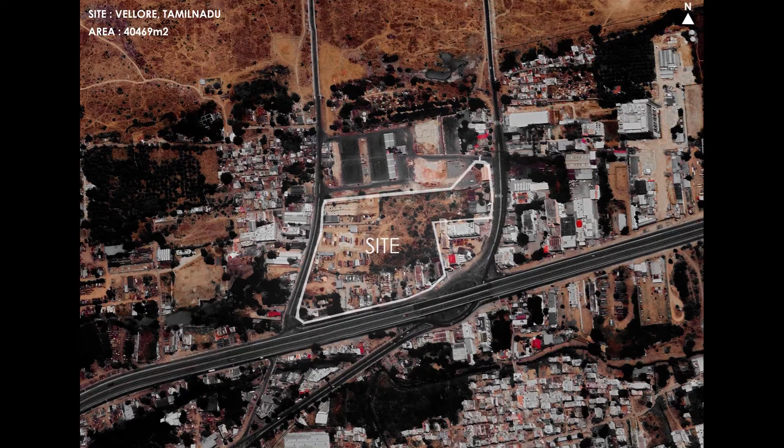The idea of the Museum of Vellore evolved with a vision to create a space expressing the history and culture of the city. The site is located parallel to the elevated highway that connects two major cities, Bangalore and Chennai, at one of the important junctions of the city.

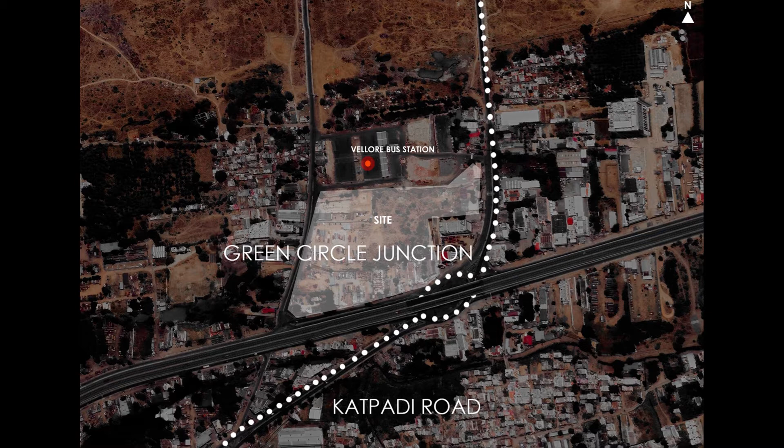People of various communities and parts pass through this junction. Behind the site is located the Vellore bus station, where several number of people transport every day. The site is currently used as a parking space.

With the detailed site study, a SWOC analysis is generated. Strengths include easier transportation access; the location is an important and very busy junction of the city, and the site is 1.5 kilometers from the Vellore Fort and Temple, which gains lots of tourism.

Weaknesses include the junction facing high traffic resulting in constant noise pollution, and no predominant landscape or vegetation present. Opportunities: the site location means the museum would become an important cultural landmark of the city. Challenges: the entrance of the site needs to be located strategically to avoid traffic congestion.

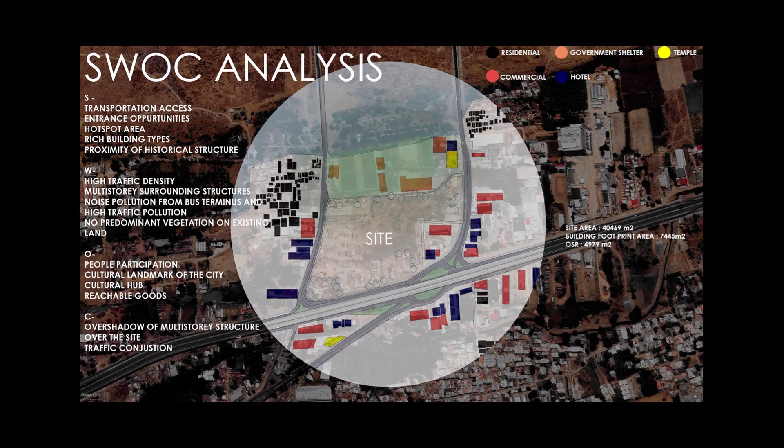I have studied 3 case studies, 2 from India and 1 from abroad. Dakshina Chitra, Chennai, is a very famous heritage center located in the Muttukadu area of Tamil Nadu state. It is an exciting cross-cultural living museum of art, architecture, lifestyle, crafts and performing arts of South India.

The program of this was more than a museum. The design of the common areas for events, cultural activities, and the crafts bazaar was very much inspiring and effective in the museum. My next case study is the National Museum of Prehistory from Taiwan.

The museum site is adjacent to the Taiwan high-speed rail route, where a train passes by about once every few minutes. Taking advantage of this unique relationship with the high-speed rail, visitors are first taken through a square glass accessway ascending to the same level as the passing trains, where they can view this ultra-fast high-tech mode of transportation as well as the futuristic facilities, showing them the modern and the future.

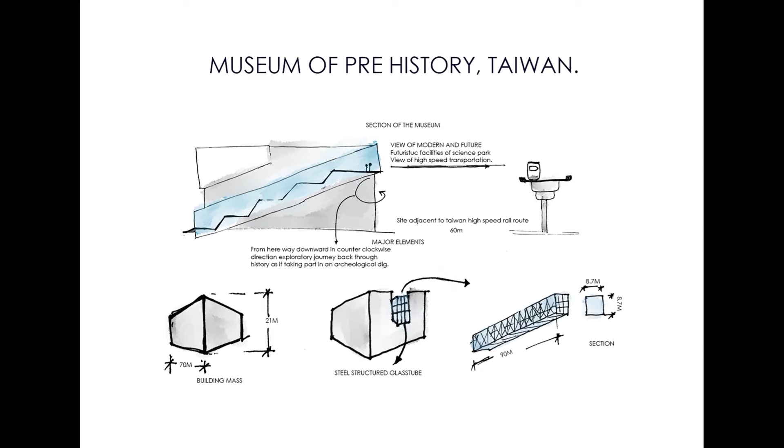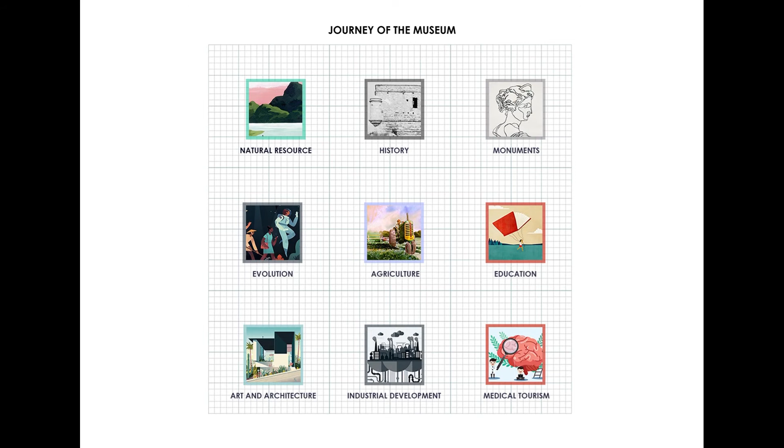Creating a museum with a base of culture, biodiversity, and economy of the city, the journey of the museum is drawn such that the viewer could radically connect with nature, history, and art and architecture. Program requirements follow.

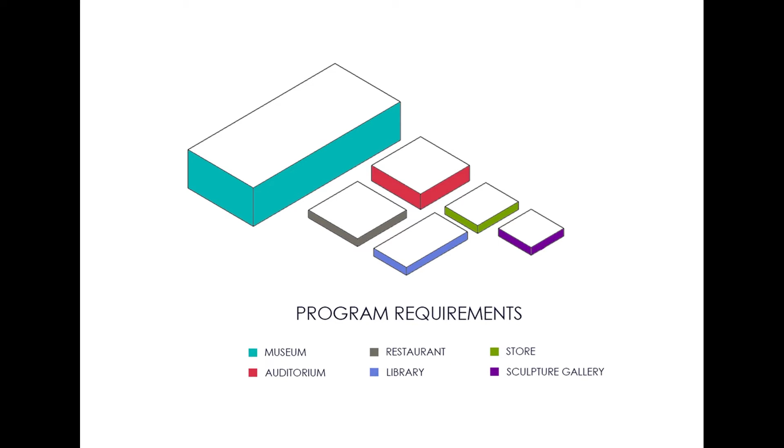Museum as a major program is designed along with restaurant, library, and auditorium. From observations made from the site study, the whole building mass is offset from the busy traffic road, creating a large arena which could also be used as an area for cultural programs during festive seasons.

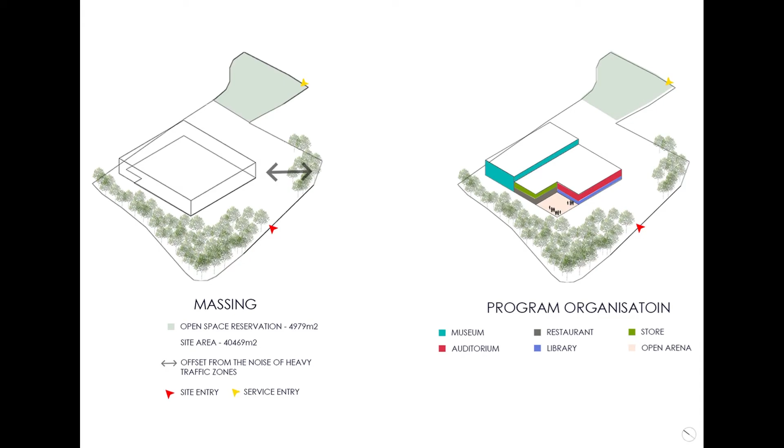This vision of an open space for events and activities which enables fusion and interaction of different cultures and connects in an optimistic manner is inspired from the case study Dakshina Chitra. A transit is created, connecting the open arena to the museum.

The library and restaurant are designed in the foreground of the large museum to create an educational and recreational destination. The entire museum is designed introverted to focus on the journey of the city, while taking advantage of the parallel elevated highway, an extroverted communal space in the form of large staircases which reaches out for the external view of the city is designed.

The journey for the city view is designed with a museum store and art gallery as levels of transition before one reaches the city view. This is made with the idea to create more communicative spaces.

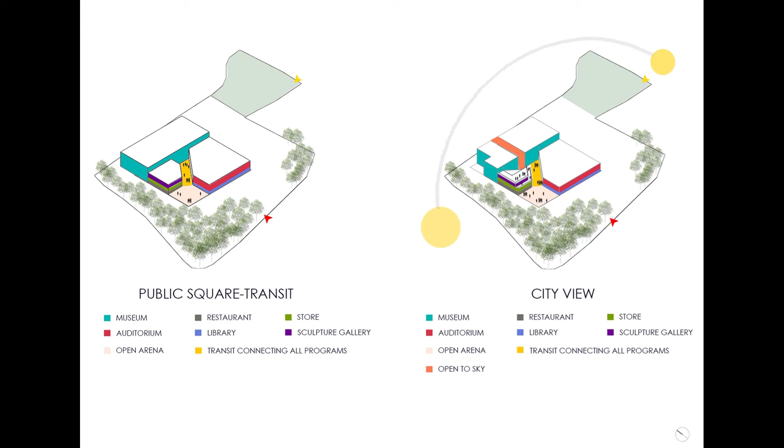The exploded view shows how the museum, library, auditorium and restaurant are designed in a connective manner, also optimizing and utilizing the potential of the surrounding views.

As said earlier, the site is approached responding to its surroundings. As one enters the site as a pedestrian, the walk from the entrance to the building, surrounded by trees, creates relaxation and serenity as a transition from the busy roads.

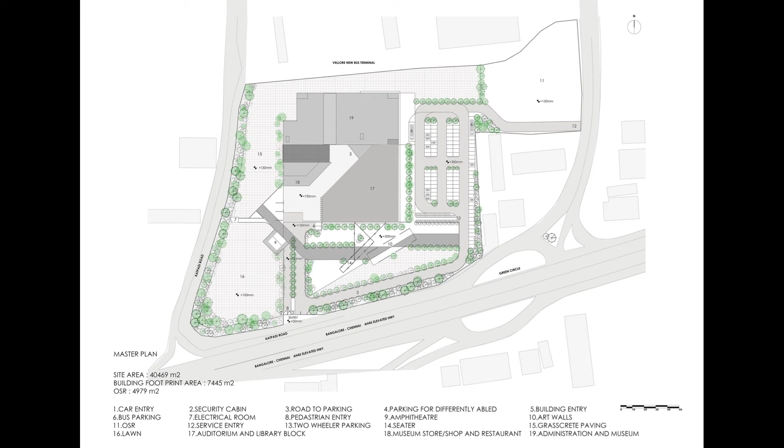The walk from the parking is through art walls and floating seaters. The landscape allows a complete space for nature with floating seaters, inspired from swings but designed as rigid seaters suspended from steel pipes. Parking near the building is allotted for differently abled visitors.

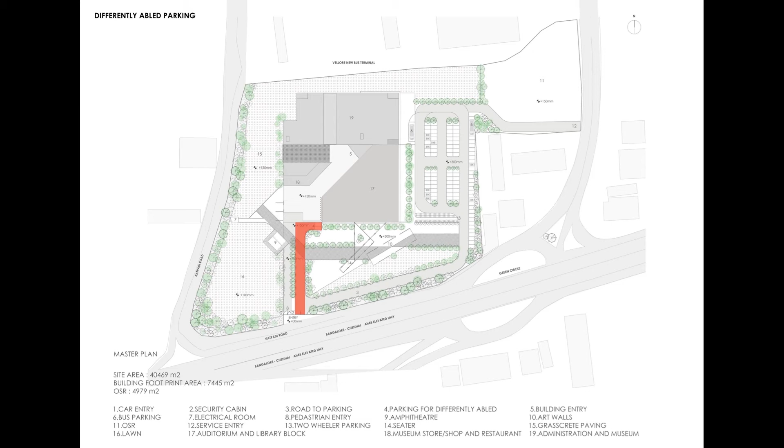I have color coded and denoted the spaces as blocks for ease of explaining in detail. Designed as functional spaces, the galleries appear in harmony on each floor. The Museum of Vellore is designed as a journey, making a radical connection with nature.

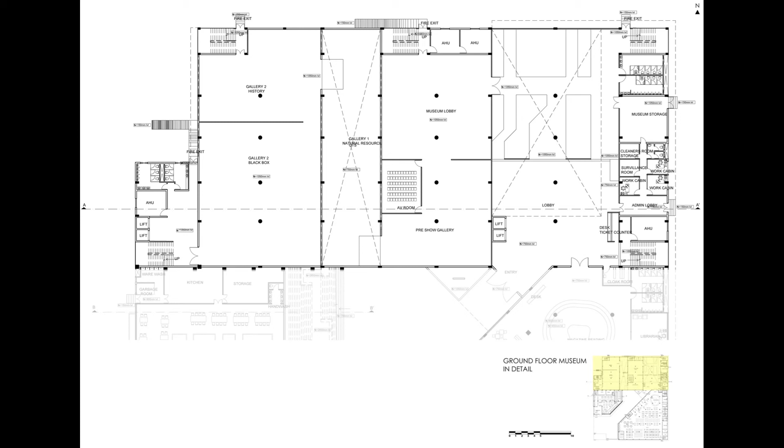Gallery 1 covers natural resources, then education and development of the city, and art and architecture. Administration space is on the ground floor, along with the lobby, the audio-visual rooms, and the pre-show gallery.

The journey starts with representing the natural resources of the city: the river Palar and the mountains around the city, which act as a natural barrier. The gallery for this is designed with riverbed flooring, a walk through river sand, and open to sky, to create a refined meaning to the space and the gallery.

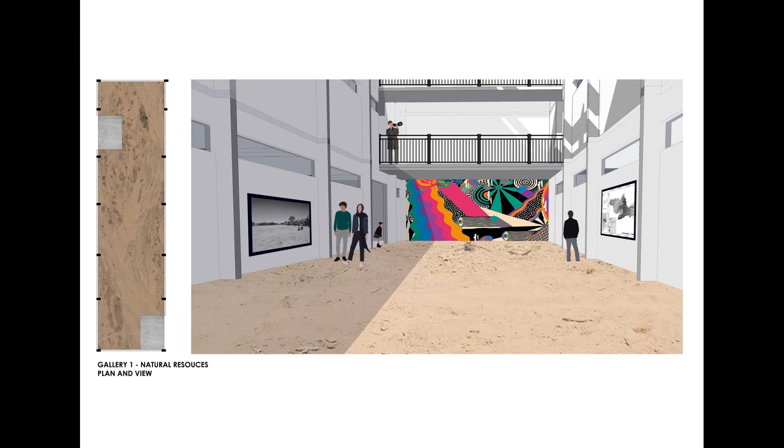Gallery 2 shows the history, the rulers of the past, and the Great Vellore Fort. The second part of gallery 2, named the Black Box, represents an important historical event, the Sepoy Mutiny, which was the first fight against the British, held in the Vellore Fort complex.

This is a 3D gallery where people are made to walk around 3D models of the sepoys fighting. The vision of the 3D gallery is to let people know the struggle, patriotism, and identity of the Vellore people.

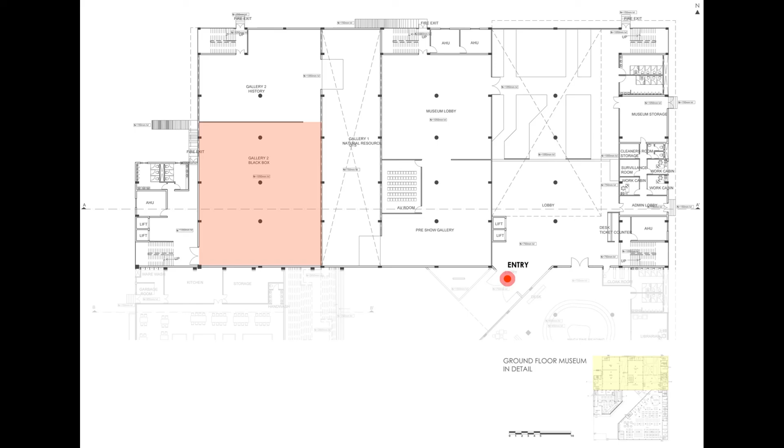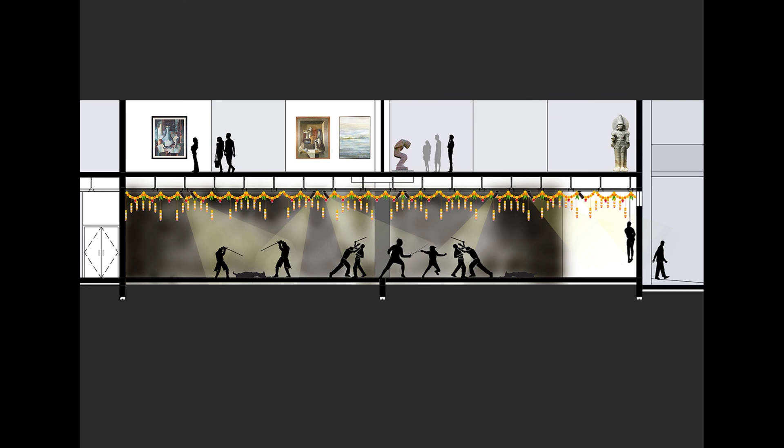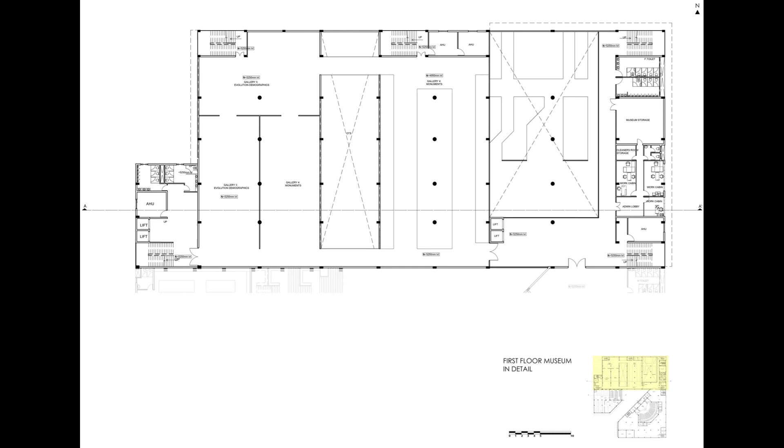After the expressive gallery, the museum continues on the first floor, and this travel acts as a transition for the impact of the gallery black box. The first floor has galleries 3 and 4, which are about evolution, demographics, and monuments.

The second floor consists of galleries 5, 6, and 7, about educational and medical tourism, the industrial gallery on leather and art, and the architectural gallery. The main administration office is also on the second floor. The third floor is designed for temporary galleries for artworks or exhibits from external artists.